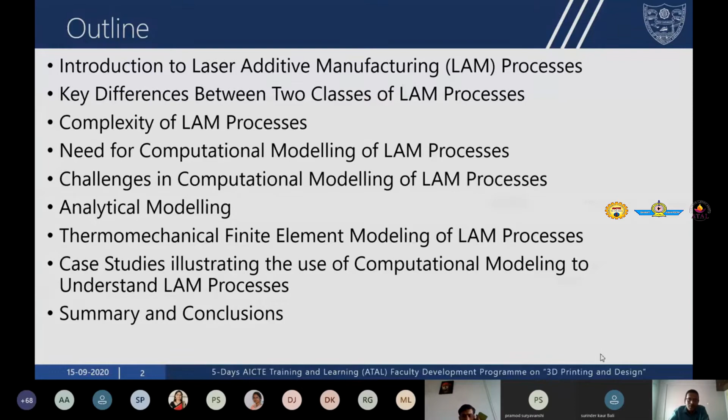As you can see here, laser additive manufacturing is a class of additive manufacturing process. You must be aware by now that in additive manufacturing, we start with a 3D CAD model, slice it into 2D cross-sectional layers, and then use a material addition process to fill the layers to build the part.

In the case of laser additive manufacturing, which is one class of AM process, you start with a 3D CAD model, slice it into 2D cross-sectional layers, and then use a laser as a heat source to melt the powder and deposit the material line by line and layer by layer.

All additive manufacturing processes have similar mechanics, and you can consider the mechanics on multiple scales. For example, continuously deposited beads or discrete droplets lead to the formation of a track of material.

You can see on the animation here a track being deposited right now, that's a track. Multiple deposited tracks or rows lead to the formation of a layer. You can see the first layer deposited, then multiple layers lead to the formation of a complex shape. So the hierarchy of AM process mechanics is: you start with a bead, multiple beads lead to a track or row of material, multiple rows lead to a layer of material, and multiple layers lead to the complex shape.

Additive manufacturing is divided into 7 major classes according to the ASTM classification. I'm only going to focus on 2 classes of AM process, essentially referred to as metal additive manufacturing processes. One is known as powder bed fusion, and the second is directed energy deposition. I'll only focus on these 2 categories, as other speakers are covering other classes.

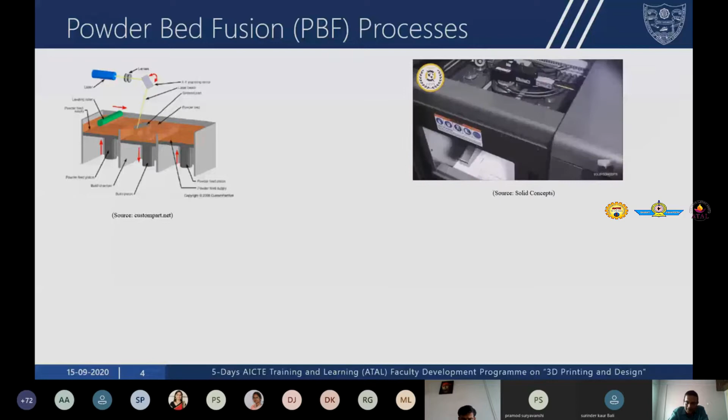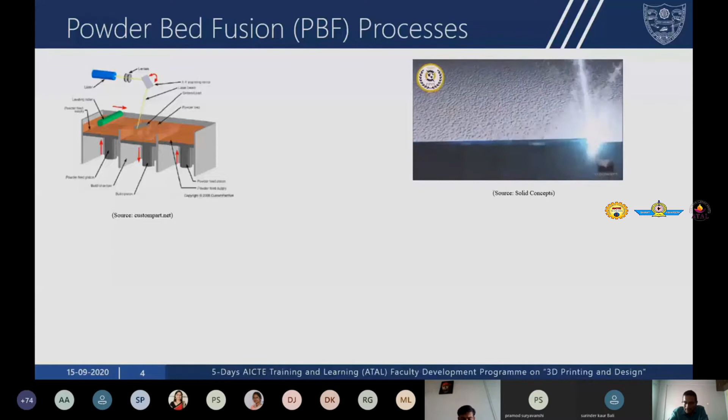Here you have the metal powder spread on a bed, and a laser scans the powder, melts it, and solidifies it. You then lower the platform to spread the next layer of powder, using a roller or a rake, and that next layer is again scanned by the laser. In this way, you build the part line by line and layer by layer.

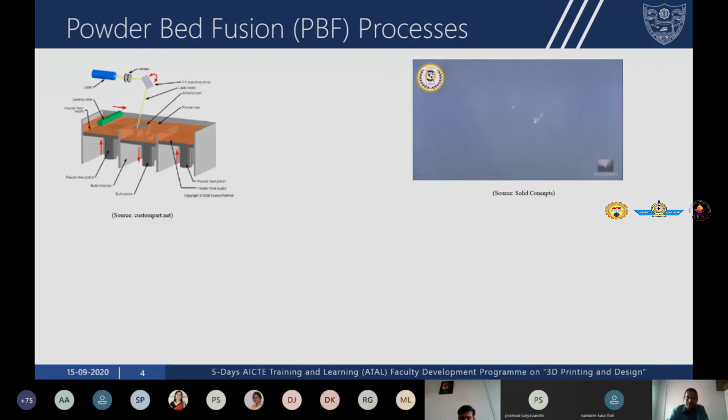You can clearly see here that you are lowering the build platform by an amount equal to the layer thickness, and raising the powder platform by a layer thickness to spread the next layer of powder. So in this way you build a part layer by layer. This process is called the powder bed fusion process, and there are 2 categories here.

If the laser is used as a heat source, you call it laser powder bed fusion, or LPBF. There is also another process where an electron beam is used as the heat source, called the E-beam process. I'm going to focus more on the laser powder bed fusion process.

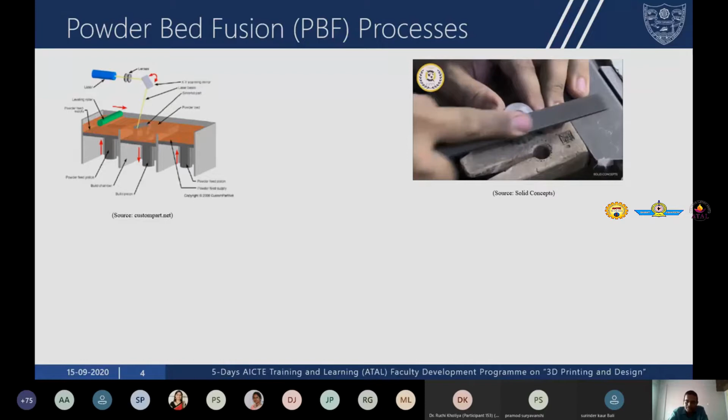The second category of process is known as directed energy deposition. Here, instead of spreading powder on a bed, we focus a high power laser beam onto a metallic substrate. This laser beam creates a molten pool on the metallic substrate.

Once the molten pool is created, you send powder through nozzles. You can see here the powder is sent through nozzles into the molten pool. This powder melts, and the substrate is then moved in the X and Y directions.

The laser moves to a different location from the molten puddle, which then solidifies, and the laser creates a new molten pool. By moving the substrate in X and Y directions, we create one track of material from a combination of several beads. By incrementing the laser beam and powder focusing lens assembly in the positive Z direction, we create the next layer. In this way, we build parts line by line and layer by layer.

The main difference between these 2 categories is: in the one shown earlier, you spread the powder on a bed and the laser scans it - that's called powder bed fusion. Here, you are not spreading the powder on a bed, you are feeding the powder through nozzles. Therefore it's called powder-fed, or directed energy deposition process.

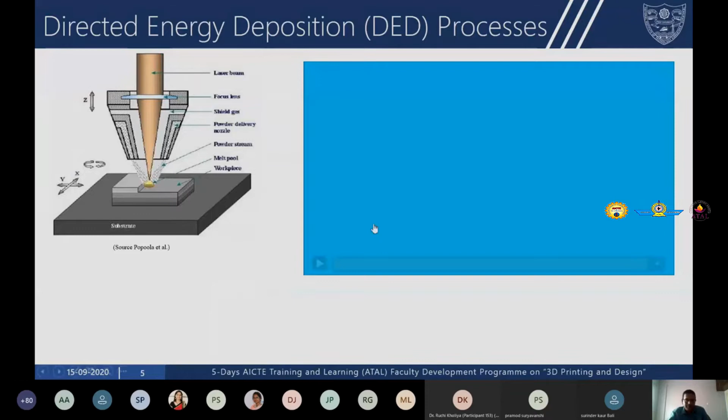Here again you have 2 categories: one that uses laser as a heat source, and one that uses electron beam as a heat source. I'm going to play a small video to highlight this directed energy deposition process. There are two techniques, and different machines have been developed, one of them called laser engineered net shaping.

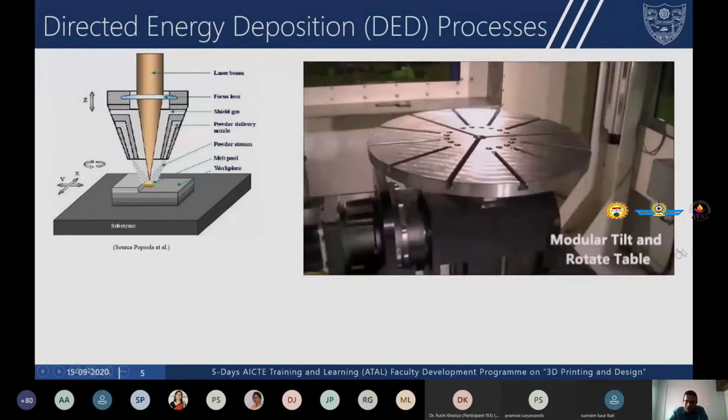So you can see here the machine. You have a rail system for handling large parts. Then you have a glove box.

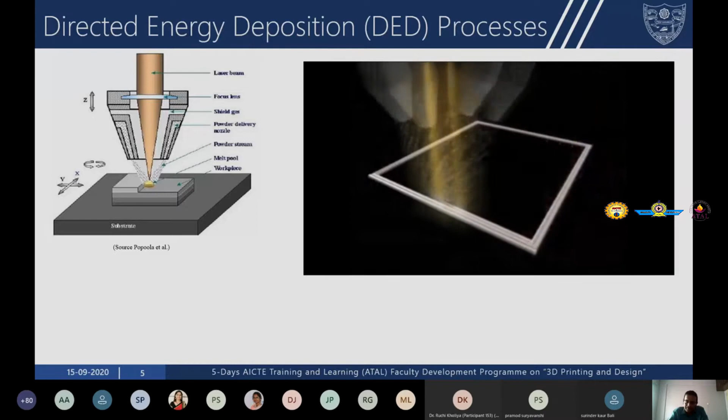So this atmosphere inside the machine will first be purged with an inert gas. You can see how the powder is being fed to the nozzle and how the powder interacts with the laser beam and creates a track of material. Multiple beads of droplets lead to a track of material.

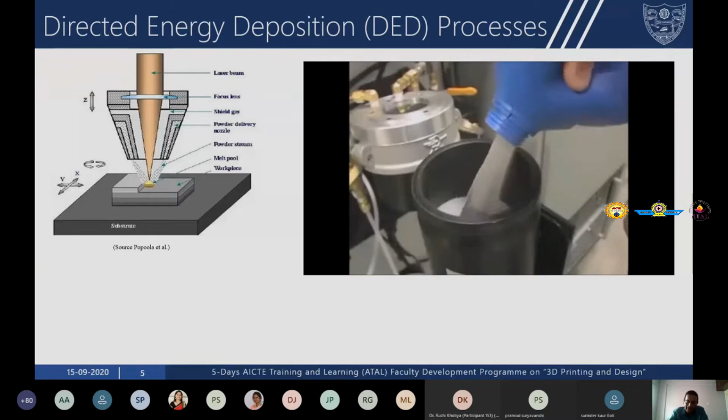Then you have the powder hopper being shown. You can feed either elemental blends or pre-alloyed powders. One advantage of this process is that you can create functionally graded structures. You can see the laser in action building the component, and the component being fabricated.

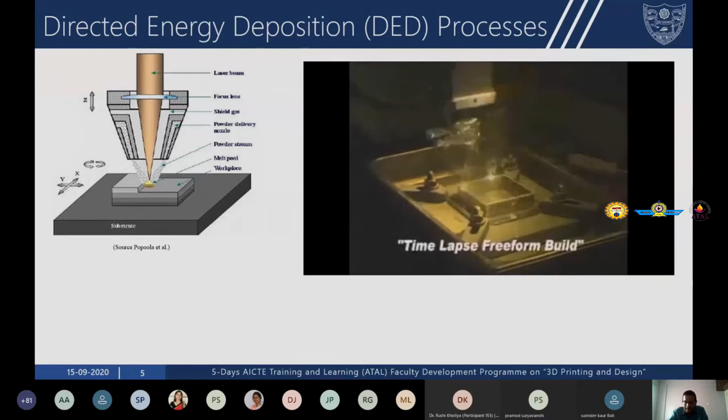You can see the deposition of a thin wall geometry using this laser additive manufacturing process. The molten region, shown in red and yellow, indicates the location of the laser and the molten material. You can see that as subsequent layers are deposited, the previous layers are heated up, and are heated and cooled. So there is a heating and cooling effect that takes place.

So this process is being used for repair of components.

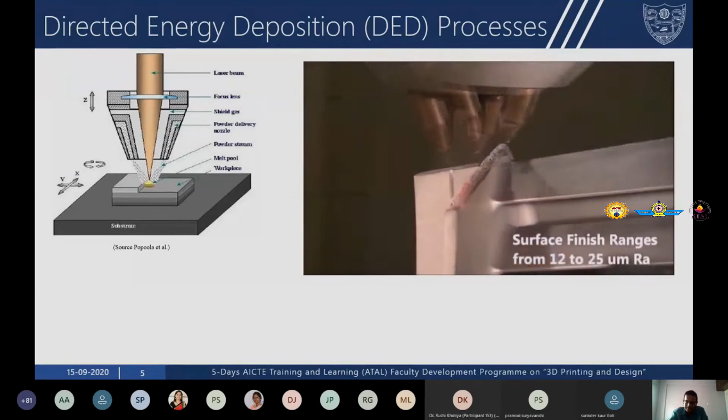So this is the second process, known as the directed energy deposition process. There are some important differences between this process and the earlier one. The directed energy deposition is also known as the powder fed process, whereas the process I showed earlier is called the powder bed process.

In terms of part size, the directed energy deposition or LDED process is capable of handling larger and heavier components compared to the powder bed process. Here the part size is limited by the handling system, whereas in the powder bed process, the part size is limited by the build chamber, and the build chamber volume is generally small.

Now, when you look at the powder particle size, the directed energy deposition process uses a larger powder particle size that varies from 50 to 150 microns, whereas the powder bed fusion process uses a much smaller particle size, from 20 to 50 microns.

The spot size of the laser beam used is larger in the case of directed energy deposition, about 0.5 to 4 mm, and much smaller in the case of powder bed fusion, which is from 50 to 200 microns.

The layer thickness is again much larger in directed energy deposition, from 500 to 1000 microns, and much smaller in the powder bed fusion process.

One of the big advantages of the directed energy deposition process is that you can deposit on an existing 3D surface or an existing part. Whereas in the case of powder bed, since you have to spread the powder on a bed, you need a flat surface or a flat preform.

The scan speeds in directed energy deposition are much lower compared to powder bed fusion. The maximum scan speed seen today is about 50 millimeters per second, whereas in powder bed fusion you can go up to 1000 mm per second.

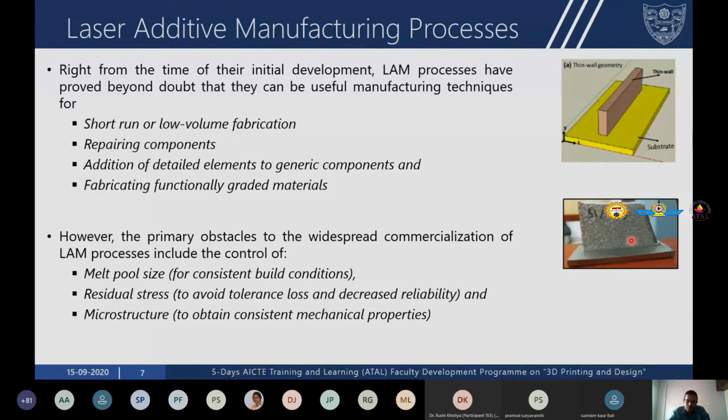This laser additive manufacturing process, both laser powder bed fusion LPBF and laser directed energy deposition LDED, are very complex in nature. The reason being that in these processes, you have a number of physical phenomena that interact with each other, sometimes simultaneously. For example, you have heat transfer, using laser or an electron beam as a heat source. Then there's fluid flow within the molten pool, the convective flows within the molten pool. Then you have melting, the powder is melted, the powder is solidified, so solidification occurs. There's a phase change, then you have solid state phase transformations. You have grain growth, you have diffusion. So a multitude of complex physical phenomena interact with each other, thereby making this process very complex.

Then several process variations are possible. For example, as I've shown you a little earlier, you have different spot sizes, different layer thicknesses, different sizes of powder particles that are used. So several process variations are possible, and then you can either spread the powder on a bed or you can feed it through nozzles. Then you have several important characteristics of the deposit that we need to understand, which I'll be discussing in the next couple of slides.

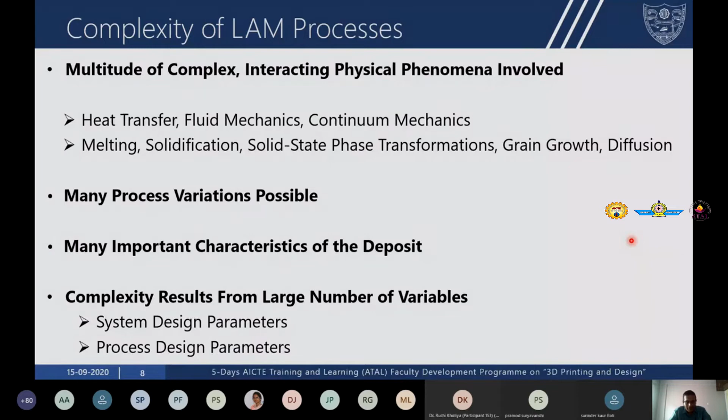Then the complexity in this process will also arise from the machine parameters as well as the process parameters. The machine parameters we are referring to as the system design parameters, and the process parameters include the laser power, what's the power that's used, the spot size of the laser, the scan speed, what is the layer thickness, what is the scan spacing, what is the scan strategy, and what is the substrate - is it at room temperature, or is it preheated to high temperatures to minimize thermal gradients, what is the inert gas flow rate, because you are going to purge the chamber with either argon or nitrogen inert gas. So what is the flow rate? Is there a post deposition heat treatment or hipping operation necessary to reduce residual stress or porosity?

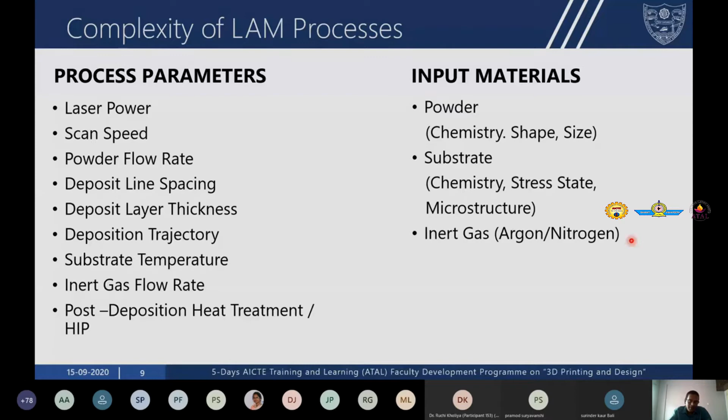And the input materials - the input material is generally powder. So what is the powder chemistry, the chemical composition? What is the powder particle shape? What is the size and particles? What is the particle size and distribution? Then what is the substrate? Because we are going to deposit this on a substrate in LDED process. So what is the composition of the substrate? What is the microstructure and the stress state? And what inert gas are we using? And what is the flow rate of the inert gas? So all of these process parameters and input materials, they add to the complexity.

Now, additionally, the complexity also arises from a large number of deposit characteristics that need to be understood. For example, as I said, we need to understand the melt pool because the melt pool controls the build conditions. So you need to understand the melt pool dimensions and shape. Then the residual stress is related to thermal gradients. We want to minimize residual stresses to decrease warping and distortion. Then we also want to look at what is the extent of bonding or lack of fusion, in other words, between the layers that are deposited. In general, you see porosity in this process. The porosity can be gas-induced porosity or lack of fusion porosity.

Then what is the microstructure that's obtained? What is the macrostructure? Then the crystallographic texture of the components, and the chemical composition. Many times the chemical composition of the powder and the chemical composition of the deposited part are going to be different because of the evaporation of the alloying elements. Then what are the structural and chemical gradients that will also cause the Marangoni effect in the melt pool.

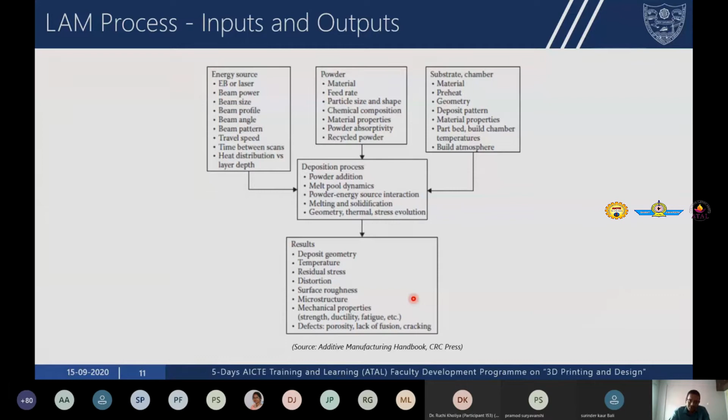Now, one of the most important aspects in metal additive manufacturing, which is a serious concern, is part quality. When you compare additive manufacturing, developed over the last couple of decades, to conventional manufacturing, the standards for qualification and certification have not yet been clearly established in additive manufacturing. This is because of the complex combination of machines, materials, processes, and techniques.

In the absence of standards and certification procedures and the absence of a reliable database, this reduces the confidence of the OEM, the original equipment manufacturer, to employ AM for fabrication of critical components for critical industries like aerospace, automobile, or medical industries.

Now, one of the big challenges in additive manufacturing comes from the multiple length and time scales. I'm going to discuss this in a couple of slides from now.

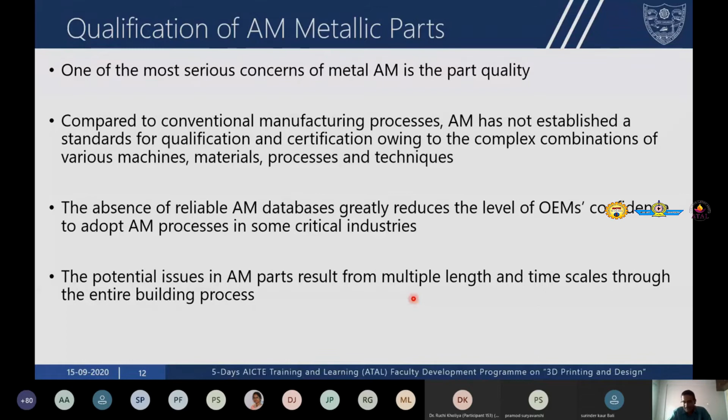How do we traditionally qualify the parts? Traditionally, parts are qualified by experimentation. This experimentation can be time consuming and expensive—sometimes creating a reliable database would take several years and cost millions of dollars.

One of the big challenges in AM is that you have a wide range of machines, a wide source of powder which can differ in particle size, shape, distribution, composition, and also the process parameters. All of this complicates the qualification procedure.

Therefore, computational modeling will play a very important role in qualification of metallic parts produced by additive manufacturing. This talk will focus on the need for computational modeling, the challenges in it, and how computational modeling can be used to gain insights into the additive manufacturing process.

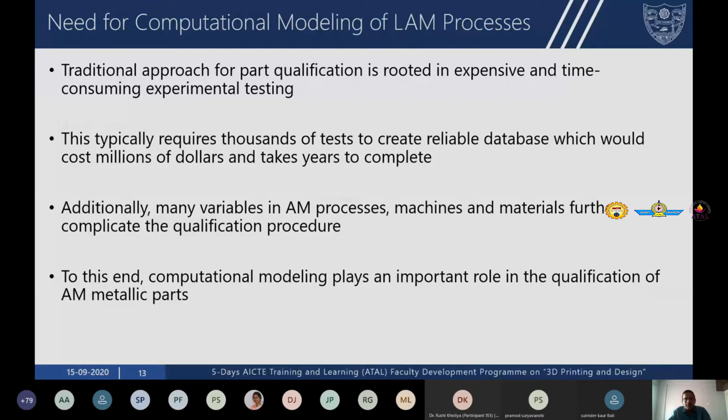One of the primary goals of computational modeling is to change how you traditionally optimize the processing parameters. Traditionally, processing parameters are optimized by trial and error, which can span a few years and cost several millions of dollars to optimize process parameters for a specific geometry and material.

If you're able to model the processes, the advantage is you'll understand the process physics better, enabling you to produce parts with consistent build conditions, lower residual stress, and consistent mechanical properties. Modeling also helps you understand physical phenomena better and obtain information that is difficult or challenging to measure experimentally, such as maximum temperature distribution, residual stress, cooling rates, and thermal gradients.

To summarize, modeling and simulation can be used as a tool to understand the effect of process parameters on the quality of deposit in the LAM processes, and thereby optimize process parameters using computational modeling, alleviating the need for extensive experimentation.

There are several challenges in the computational modeling of the LAM process. One of the first challenges is how do we model the addition of material? In additive manufacturing, you are building a part by addition or consolidation of material, so how do you model that addition?

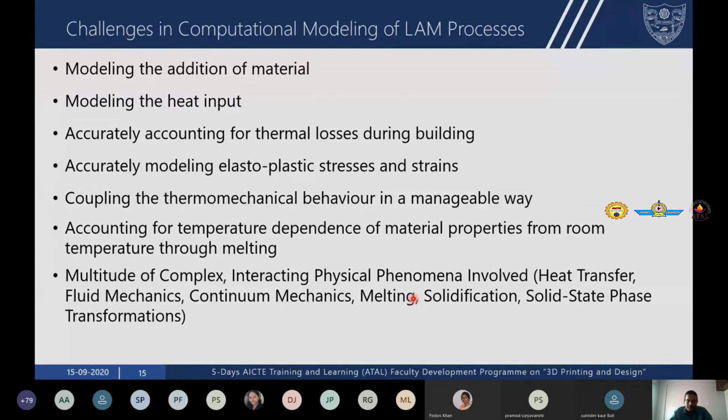As mentioned earlier, one challenge in additive manufacturing is that it involves multiple length and time scales. What do we mean by this? Consider the diameter of powder particles - you're anywhere in the range of 20 to 50 microns in powder bed fusion process, to 50 to 150 microns in direct energy deposition process.

I mentioned 50 microns for the LDED process. The diameter of the laser beam in LDED can be anywhere from 0.5 to 2 mm - you can see the order of difference in length. The dimensions of the workpiece can be anywhere from few cubic centimeters to few cubic meters - again an order of difference of length.

And the build time can be anywhere from a few hours to a few weeks - again an order of difference of time.

For example, this data is obtained from a CRC Press handbook on additive manufacturing, showing the estimated computer simulation time for a build height of 100 mm - a very small build height - with a layer thickness of 20 microns and 5000 layers. You can see it took several days even with GPU machines.

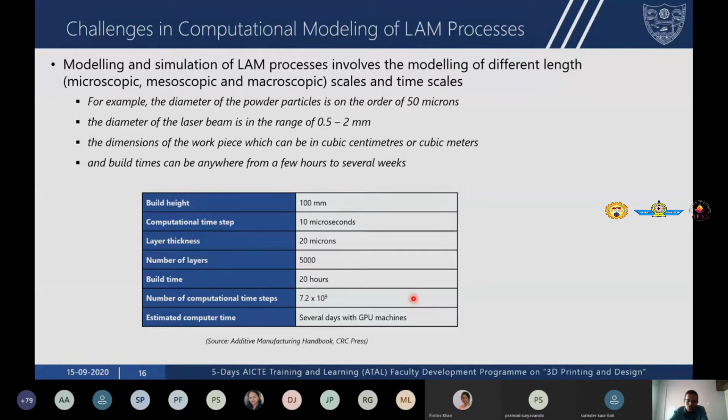You can see that even the most sophisticated high performance computers take significantly high computational time to solve simple AM geometries. So one of the greater challenges for simulation is completing the simulations in useful time.

You should be able to complete the simulations in a small fraction of the build time. Thereby, you should be able to optimize the process parameters for a certain build or deposit within a small fraction of time, before the first part is deposited.

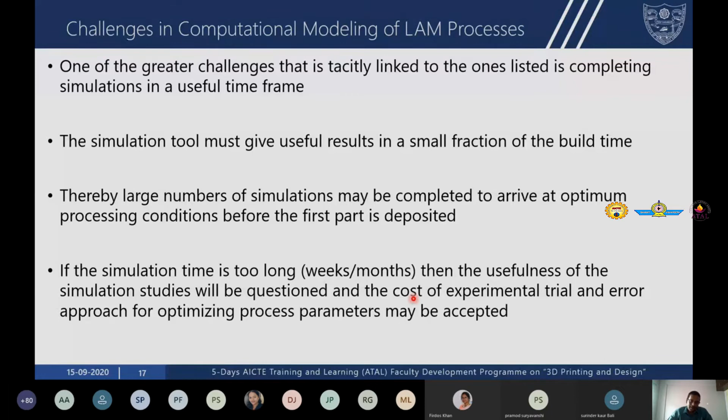If the simulation time is too long - taking weeks or months - then the industry people will question the usefulness of the simulation. If you're able to deposit parts in weeks and months, and simulation takes the same amount of time, the industry will question its usefulness, and the expensive trial and error approach of optimizing process parameters, involving a lot of time and money, will be accepted instead.

The first challenge in the laser additive manufacturing process is how do we add material? Additive manufacturing can be thought of as multi-pass welding. In welding, you are joining two materials, generally about one row of material, but in AM you're adding materials - so it's nothing but multi-pass welding.

Now, how do you take into account this addition of material? Generally, a technique used in welding called the element birth death technique is used to add material. Now, whenever you're adding material into a finite element model, essentially what you are doing is increasing the number of equations.

Now, we cannot add this material once the simulation has started. So essentially, the model has to be created in the pre-processing step itself, and the model is going to be meshed into elements and nodes.

Now, at the start of the simulation, the elements are deactivated or made dead by multiplying their material properties with a scaling factor of 10 raised to minus 6. This ensures these elements do not contribute to the global system of equations in the finite element system.

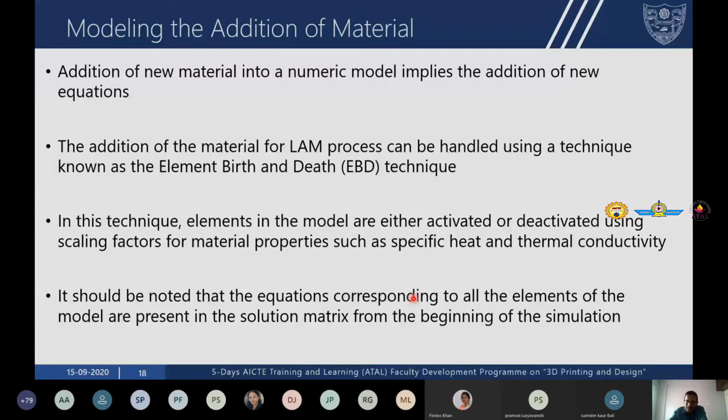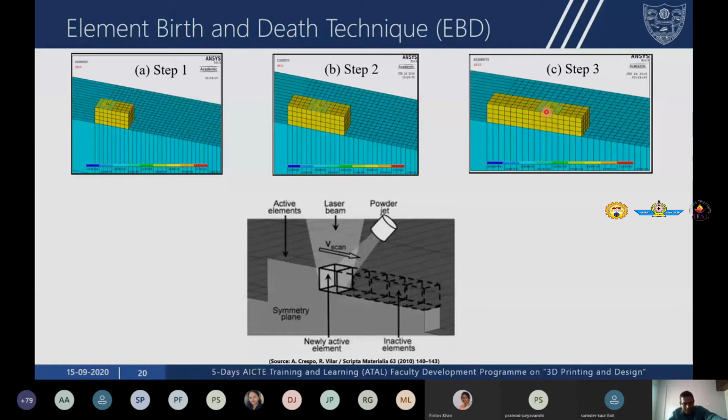Now, when we say inactive elements, we are not going to remove them from the model. We are only making them inactive by multiplying their thermophysical properties by a small value such as 10 raised to minus 6, so that they don't contribute to the stiffness matrices. That is called the scaling factor.

Now, when we reactivate these elements, when the laser comes over them, we reactivate the element. When we reactivate, what do we do? We bring the material properties of these elements back to the original values. The original material properties are reassigned. So that is called element birthing or activation of elements.

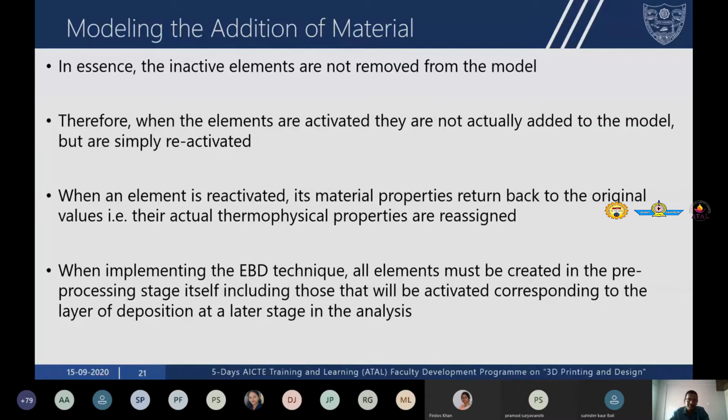Second challenge is, how do we model the heat input? In the laser additive manufacturing process, the heat source is a laser. Now, how do we account for the heat input from the laser? One of the most commonly used models to account for this is that the laser is generally modeled as a heat source with a Gaussian distribution.

There are other heat source models, such as a volumetric heat source model where optical penetration depth is also considered, and these have been used in literature in the simulation of LAM processes.

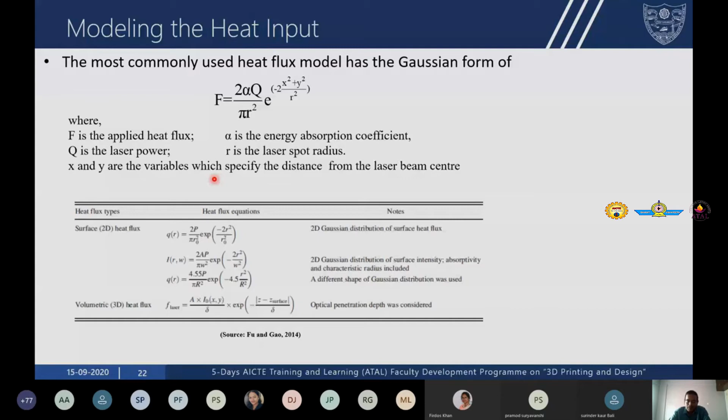One of the important challenges in computational modeling of laser additive manufacturing is the laser absorption coefficient alpha. This absorption coefficient depends upon several parameters, starting with the material being processed. For example, if you look at aluminum and titanium, aluminum, being highly reflective, will have a lower absorption coefficient compared to titanium.

The absorption coefficient alpha also depends on the surface roughness of the material, whether oxide films are present, the temperature of the material, and the wavelength of the laser. Nd:YAG lasers have a different wavelength compared to CO2 lasers. It also depends on the angle of incidence of the laser beam, the interaction time between the laser and powder particles, the power density, defined as power divided by scan speed times diameter, the particle size and distribution of the powder particles, and the laser spot size and profile.

All these factors affect the laser absorption coefficient alpha, and this parameter is needed for computational modeling work, yet it is a very complex parameter to obtain experimentally.

Now, there are other heat source models that have been used in literature. These heat source models take into account phenomena such as fluid dynamics in the molten pool, because it has been widely established in the simulation of welding and additive manufacturing that convective flows within the melt pool play a very important role in determining the shape of the molten pool. The driving force for these convective forces can be buoyancy or density differences within the molten pool, or surface tension driven flows, also known as the Marangoni effect, or thermocapillary flow. Fluid flow and heat transfer are both very important in determining the size and shape of the molten pool, as well as the micro and macro structure of the additive manufacturing components.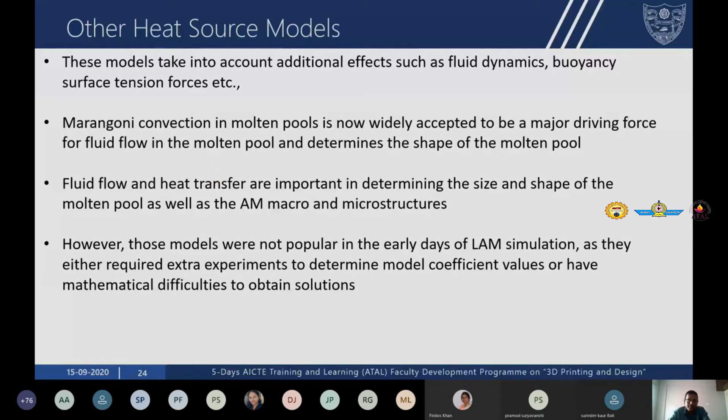The next step is modeling the heat transfer. We all know that in additive manufacturing, multiple beads lead to a track, multiple tracks to a layer, and multiple layers to a part. So essentially, we are consolidating material to form the part. How are we consolidating material? By using a heat source. Now, what is happening to the energy that comes from the heat source? This energy is taken by the powder.

A part of this energy is dissipated by convection and radiation. There is also conduction. So how do we account for this energy loss by convection, conduction, and radiation? You can use the energy balance equation from thermodynamics, and express this as QL equals QCD plus QCV plus QR, where QL is the heat flux from the heat source, QCD is the heat loss due to conduction, QCV is the heat loss due to convection, and QR is the heat loss due to radiation.

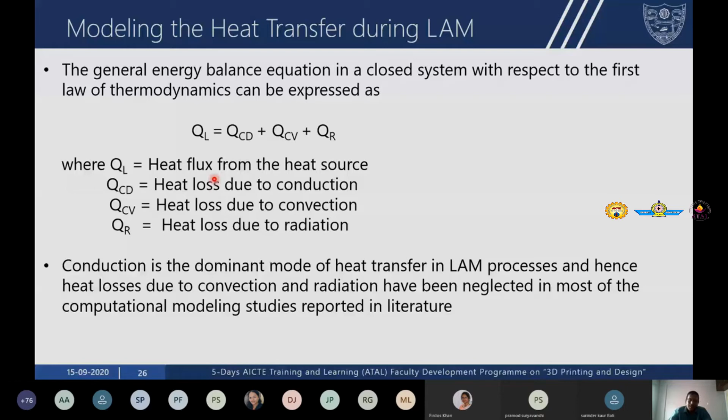Now, it has been widely established in laser additive manufacturing process that the predominant mode of heat loss is conduction through the substrate, which acts as a heat sink, and the heat losses due to radiation and convection are much smaller when compared to conduction. In many cases, the heat losses due to convection and radiation have been neglected in the computational modeling studies reported in literature.

Now, as you're all aware, there is a phase transformation occurring from solid to liquid during heating and from liquid to solid during solidification. In order to account for the phase transformation, the enthalpy change due to the phase transformation needs to be taken into account. This enthalpy change is dH equal to Cp dt, where Cp is the specific heat. Now, including the enthalpy change, the heat conduction equation takes this form.

The initial conditions for heat transfer can be expressed by defining an initial condition, the initial temperature of the substrate. The substrate can be at room temperature or it can be preheated to minimize the thermal gradients. The heat losses by convection and radiation are also considered from the free surface of the part. Here, H is the convective heat transfer coefficient, sigma is the Stefan-Boltzmann constant, epsilon is emissivity, and Q dot S is the rate of heat input from the beam. So this is the equation that we are going to solve: the heat conduction equation incorporating the enthalpy change, this is the initial condition, and this is the boundary condition.

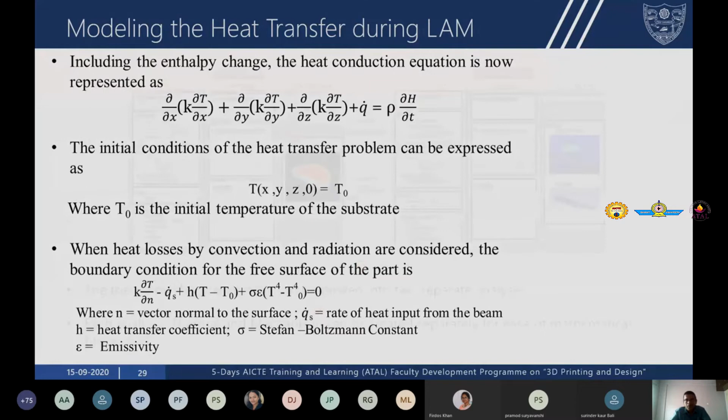Now, one important challenge is how do we couple the thermomechanical behavior? In additive manufacturing, the heat is causing the mechanical response. So you have a thermomechanical phenomenon occurring, and the residual stress is evolving because of the temperature. This thermomechanical phenomena can be broken into two analyses: thermal and mechanical.

Now, either they can be conducted simultaneously or sequentially. If they're conducted simultaneously, it's called a coupled analysis. If conducted sequentially, it's called an uncoupled analysis. This animation shows a thermal analysis and a mechanical analysis. If done simultaneously, it's called coupled; if done sequentially, it's called uncoupled. I'm going to explain what I mean by that.

Now, in the thermal analysis and mechanical analysis, you have different steps: pre-processing, solution (processing), and post-processing. The same goes for the mechanical analysis. In the pre-processing stage for both, you have geometry, meshing, boundary conditions, loading, and material properties. The equations solved in the thermal analysis and the mechanical analysis are shown here.

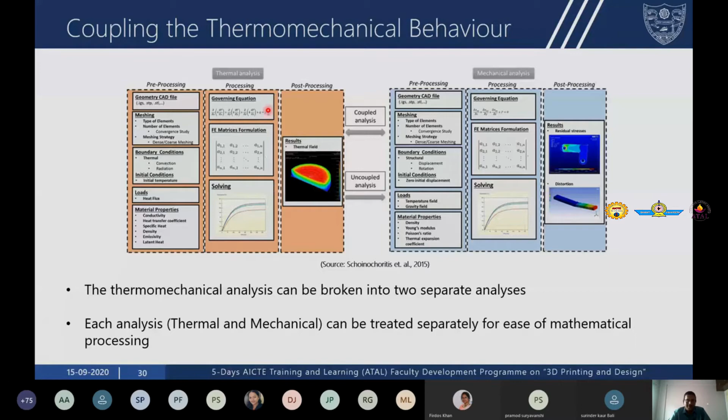Now, when you are solving the coupled analysis, essentially there is an interaction between the temperature and the stress field. That is, the upstream affects the downstream and the downstream affects the upstream. Temperature affects the mechanical response — let me explain this way.

When there is a thermal gradient, a residual stress is produced, and when these residual stresses exceed the yield point, plastic deformation is caused. This plastic deformation is converted into heat, and this heat is used in the calculation of the temperature field. So there is an interaction between the temperature and stress fields in the coupled analysis — you have to solve the thermal analysis and the mechanical analysis simultaneously.

Whereas in the uncoupled analysis, there is no interaction between the temperature and the stress fields. You do the thermal analysis first, then record the nodal temperature as a function of time at each node in the model, saving it as a file, and then input that into the mechanical model. This is called uncoupled analysis.

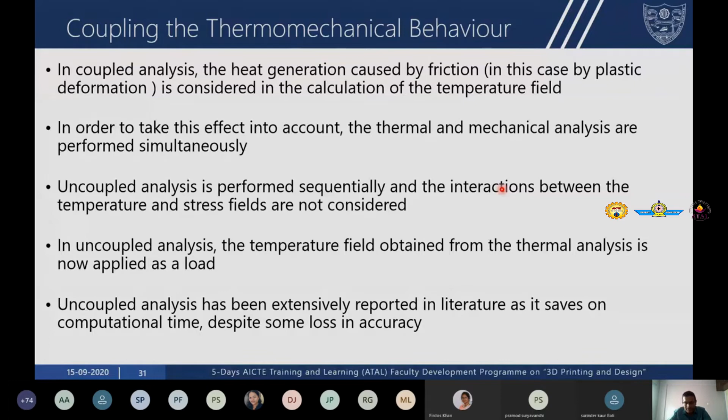Now, uncoupled analysis has been widely reported in literature because it's less complex — you are solving fewer equations at the same time. Even though there is some loss of accuracy, it has been more widely reported in literature compared to coupled analysis. So this is the flowchart for the uncoupled analysis.

First, you perform the thermal analysis. You define the initial conditions, boundary conditions, loads, and material properties. You save the results from the thermal analysis as a jobname.rth file, and then at every node in the model, you record the temperature as a function of time, which is read into the structural analysis as a load.

In the structural analysis, the element type is again changed. You apply the boundary conditions, loads, and material properties, then solve the structural analysis. The file is called jobname.rst, and you obtain displacements, strains, and stresses.

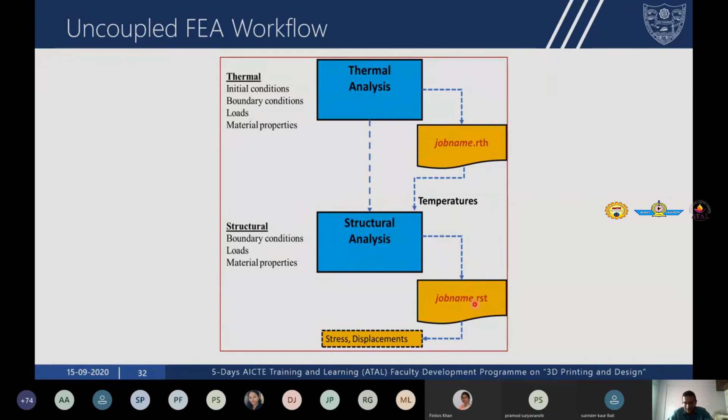I'm going to discuss now about analytical modeling. So far I have discussed the different classes of LAM processes, the differences between the two classes, why they're complex in nature, and the challenges in computational modeling of these processes. Now I'm going to discuss analytical modeling, which, as all of you are aware, is a closed-form solution that you can obtain mathematically.

In the early days, when laser additive manufacturing processes were developed, people were looking at how to find the cooling rate when depositing stainless steel 304 or titanium. They were interested in finding the gradients that contribute to residual stress. So they went back to literature and found that analytical models existing in welding literature could be used for additive manufacturing, since additive manufacturing is nothing but multi-pass welding.

The Rosenthal solution makes several assumptions. The first is that the properties of the material are constant — they do not vary with temperature, but in actual physical sense, material properties vary with temperature. The geometry is infinite or semi-infinite, meaning the dimensions are such that the melt pool never sees the free edges. The heat source is a point heat source, and the rate and energy of the heat source remain constant, as does the speed of travel of the heat source.

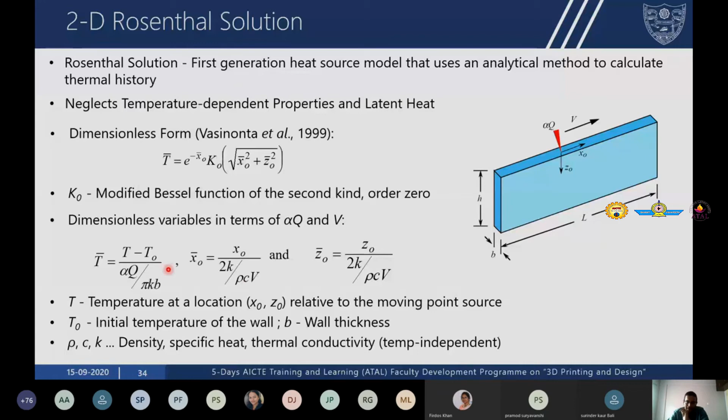So T bar equals T minus T naught, divided by alpha q over pi k b, where k is the thermal conductivity, which is constant, b is the wall thickness, rho is the density, and c is the specific heat. The thermal conductivity, density, and specific heat are all considered constant or temperature independent properties. T naught is the initial temperature, and T is the temperature at location x naught, z naught relative to the moving point heat source.

Now, from this equation, we can differentiate with respect to time and obtain an expression for the cooling rate. This is the expression for the cooling rate, where the dimensionless time is defined as follows. This equation can again be differentiated to obtain expressions for dimensionless thermal gradients, both in the x direction and in the z direction.

The dimensionless thermal gradient in the x direction is given by this equation, and the z direction is given by this equation. In all these three equations, K1 is a modified Bessel function of the second kind, order 1.

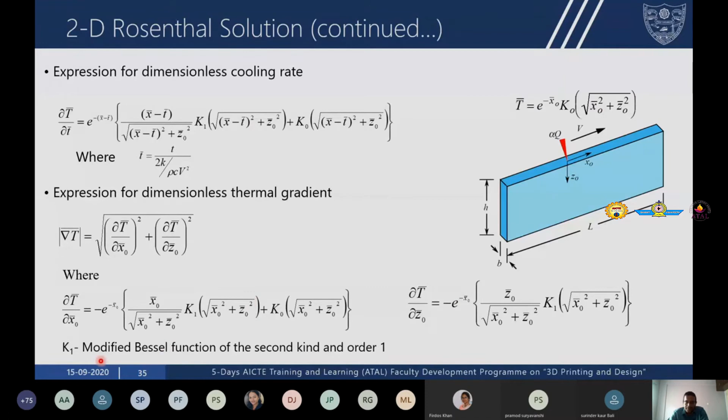Now, when you're obtaining dimensionless values, they may not make much sense, so you have to convert them into actual values. The relationship between dimensionless cooling rate and actual cooling rate is given by this expression, and the dimensionless thermal gradient and actual thermal gradient is given by this expression.

Now, how do you find out the cooling rates and thermal gradients? When you have a heat source, it's going to create a molten pool. So we are going to evaluate.

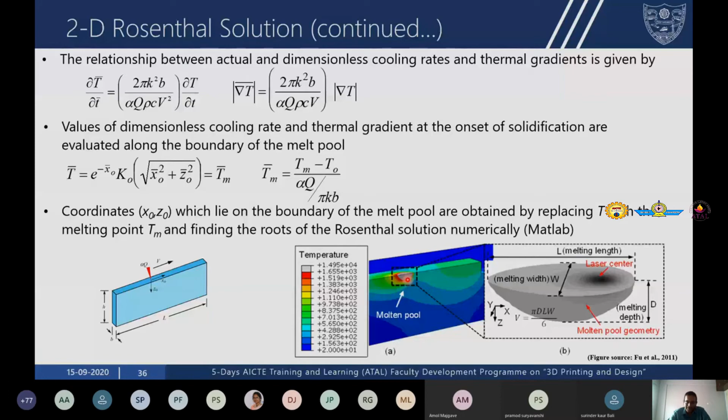Now, it's important to understand that these process maps have been generated for constant material properties. Therefore, they can be applied to any material system.

Now I'm going to discuss finite element modeling of the LAM processes.

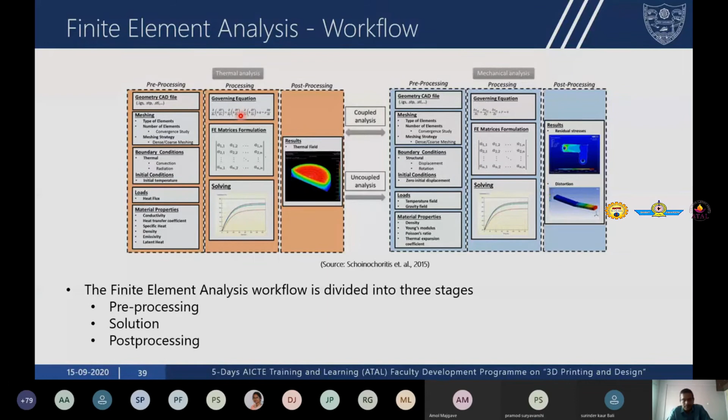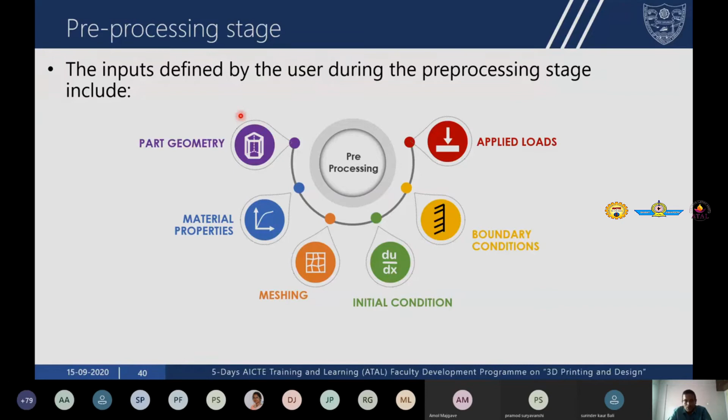In the pre-processing stage, you have to define the geometry of the part that you're building, and the material properties of the material being deposited. These material properties can be a function of temperature, both thermophysical and mechanical properties such as elastic modulus, yield strength, and so on. You have to mesh the part, apply initial conditions such as substrate temperature, apply boundary conditions such as convection and radiation, and apply loads such as heat flux. All of this is done in the pre-processing stage.

For material properties, in the thermal analysis you have to define properties such as density, specific heat, thermal conductivity, and latent heat, which accounts for the phase change. For the mechanical analysis, you define properties such as elastic modulus, yield strength, Poisson's ratio, a hardening model, and a coefficient of thermal expansion. Many of these properties are defined as a function of temperature.

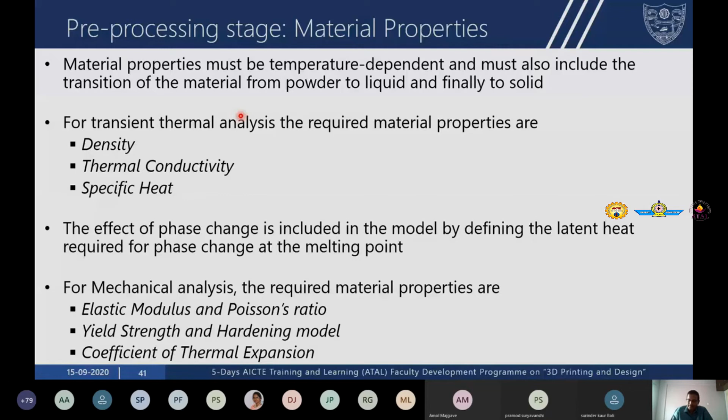An important step in pre-processing is meshing. As discussed earlier, in AM we use the element birth and death technique to simulate the addition of material. The accuracy of the simulation is determined by the characteristics of the mesh. The problem is, if we go for a very fine mesh, that increases computational time, and AM simulations, because of multiple length and time scales, are already very time consuming.

Therefore, a popular technique used in AM is to apply different mesh densities in different regions of the model. In regions near the heat source with steep thermal gradients, a very fine mesh is used for accurate analysis, while regions away from the heat source use a coarse mesh. As you build layers, when depositing the 20th layer, the thermal effect on the 10th layer may become less significant. In such cases, already deposited layers may be meshed with a coarse mesh to reduce the number of elements in the model. So you're using a meshing scheme with different mesh densities in different regions, along with adaptive meshing based on the location of the heat source.

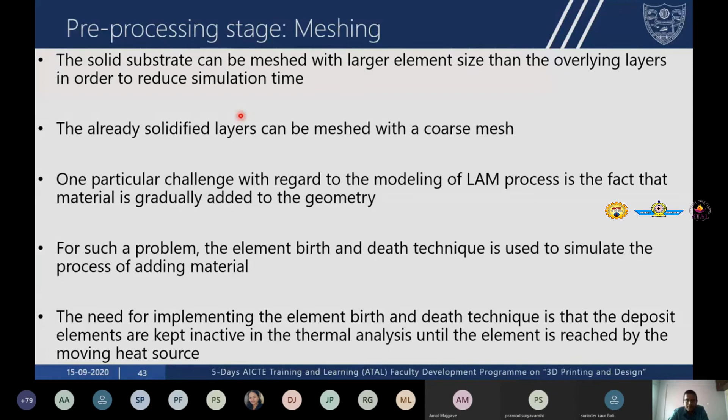As I said, already solidified layers can be meshed with a coarse mesh, and we use the element birth and death technique to add material and consolidate the part. In the solution stage, we are essentially solving partial differential equations.

I've shown earlier the equation we want to solve for the heat transfer problem. The physical mechanisms that drive this laser additive manufacturing process are highly nonlinear because of the temperature variation of material properties and latent heat effects. Therefore, we solve nonlinear FEM models using either the implicit method or the explicit method for solution.

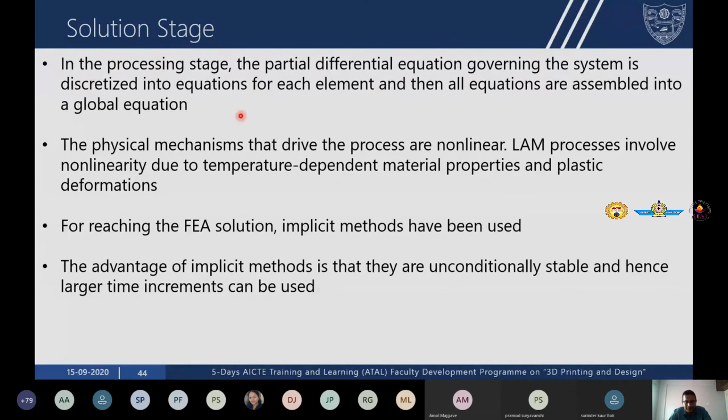This is the heat transfer problem discussed earlier, written in the finite element system of equations. Here, K is the thermal conductivity matrix, C is the specific heat matrix, T is the vector of nodal temperatures, T prime is the time derivative of T, V is the velocity vector which equals 0 as mass transport is neglected, and Q is the nodal heat flow vector.

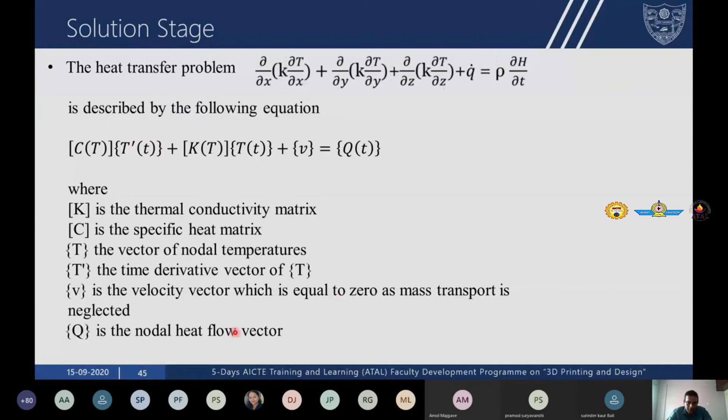Once you solve the thermal analysis, you may have to solve the mechanical problem simultaneously or sequentially. For the mechanical problem, we replace the thermal element with a structural element that can handle elastic-plastic behavior. The resulting model undergoes a nonlinear elastic-plastic structural analysis, requiring temperature dependent material properties such as yield strength, thermal expansion coefficient, and elastic modulus, along with a hardening model, which can be bilinear or multilinear.

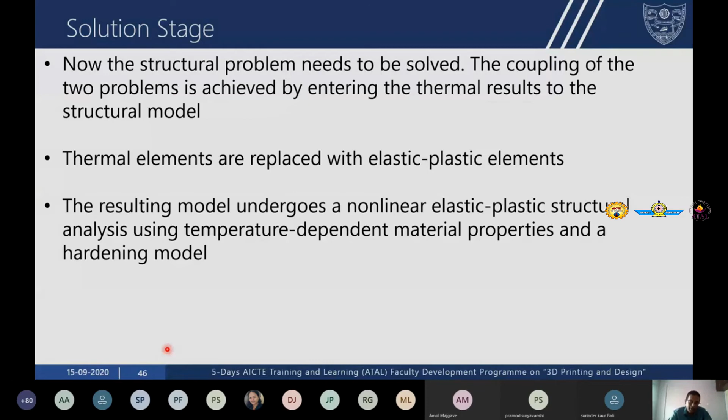In the uncoupled analysis, we read the nodal temperatures from the thermal analysis into the structural analysis as a load.

This animation shows the finite element simulation of a thin wall geometry using the finite element software package ANSYS. You can clearly see that a single layer is being deposited, a single track of material in each layer, and multiple layers are being deposited for the thin wall part. So remember the mechanics: bead to track, track to layer, layer to part.

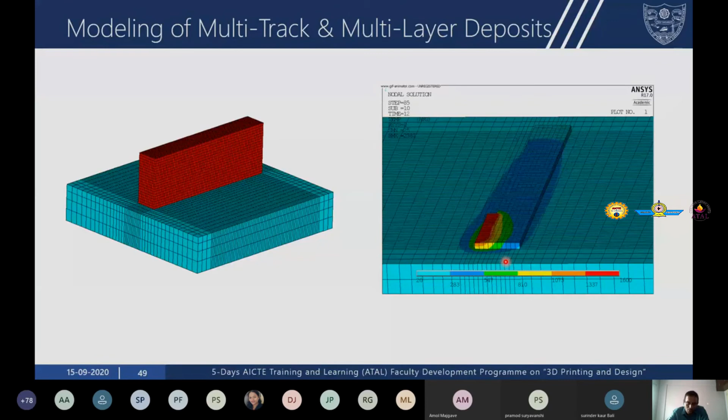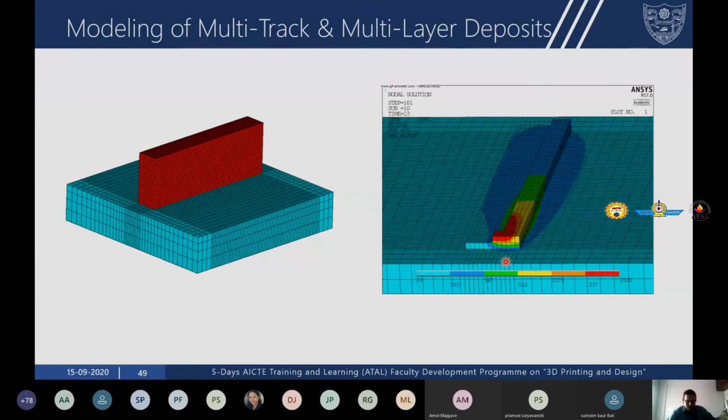Once you finish the solution, the next stage is post-processing, where you can extract a wide variety of information from the finite element models. One piece of information is the dimensions of the melt pool — you can find out the length, width, and depth. A consistent melt pool is required for consistency in the build conditions.

We can find out the shape of the melt pool, which is influenced by the convective flows within it. We can find the maximum temperature and the distribution of temperature, the thermal cycling undergone by each layer, and the rate of cooling, which determines the grain size. We can find thermal gradients, which determine the residual stress, and the cooling rates and thermal gradients together influence the grain morphology. We can also determine the thermal stresses and strains.

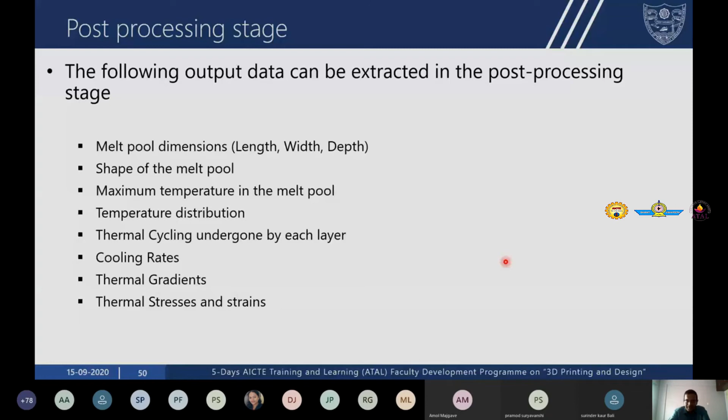Now I'm going to present some case studies that we have carried out at NITK using computational modeling of laser additive manufacturing process to understand and gain insight into these processes. The first study is

using the material system titanium alloy Ti64, one of the most widely used aerospace alloys. This work has been published, and the publications are mentioned here. I'm going to discuss the effect of process variables on key deposit characteristics in laser deposited Ti64.

Here I'm showing you the simulation of a thin wall geometry of Ti64, where you can see the evolution of the melt pool geometry as the number of layers increases. You can clearly see that as the number of layers increase, the size of the melt pool increases.

This is because when depositing the first layer, you have the substrate beneath it, which is at room temperature generally, acting as a heat sink and removing heat. But as you deposit subsequent layers, the effect of the substrate decreases, and therefore the size of the melt pool increases as the number of layers increases.

This poses a challenge because we need a consistent melt pool for consistency in build conditions. Therefore, a number of additive manufacturing processes use real-time feedback control, so that as the melt pool size increases, the process parameters are changed — either power is decreased or scan speed is increased — to maintain consistency in the melt pool.

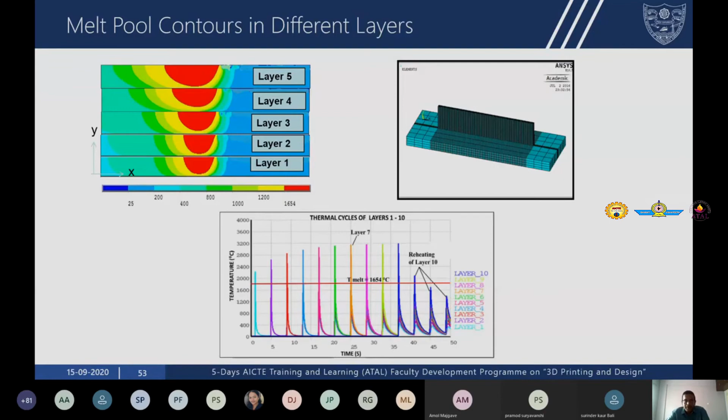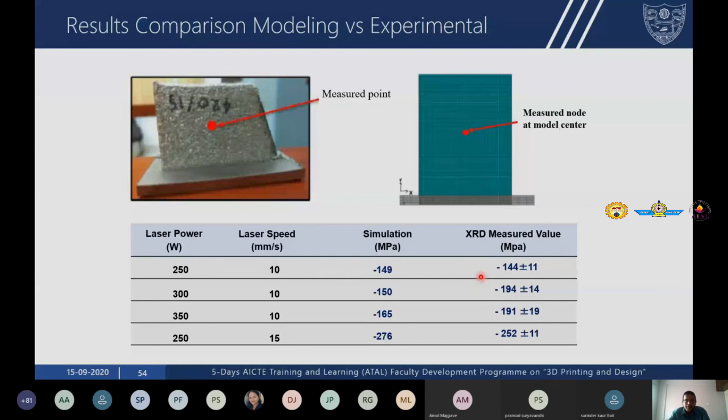As shown earlier, we have used analytical solutions to obtain process maps for cooling rates and thermal gradients. You may ask why use an analytical solution which makes several assumptions regarding constancy of properties, semi-infinite geometries, constant heat input, and constant travel speed of the laser. The advantage is that you can obtain a ballpark value of cooling rates and thermal gradients for different materials and processing conditions within a few minutes, compared to finite element models which can take a few days to a few weeks depending on complexity.

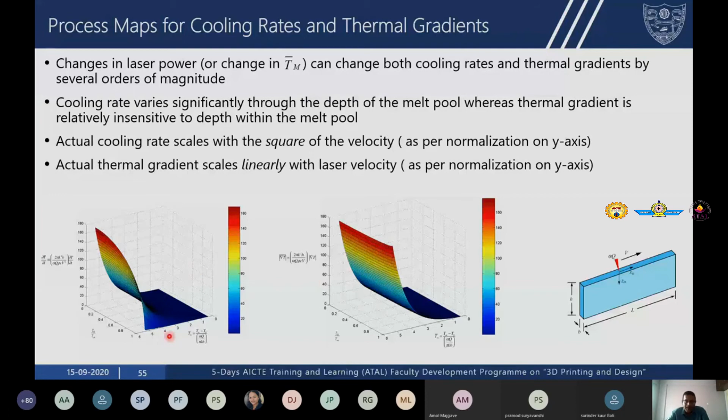So here, we ran the analytical models, obtained the process maps, and used that information to define a new parameter called solidification rate R, which is the ratio of cooling rate to temperature gradient G. This solidification rate and cooling rate can be used on solidification maps available for some materials such as Ti64 and Inconel 718. These maps enable you to predict whether the grain morphology upon solidification will be columnar, equiaxed, or mixed.

The next slide shows comparison results. This is a solidification map plotting G, the thermal gradient, on the y-axis, and R, the ratio of cooling rate to thermal gradient, on the x-axis, from the finite element model results. The map is divided into three regions: fully columnar, mixed, and fully equiaxed. This is for different powers at a constant scan speed.

These results are from the analytical model, the Rosenthal solution, again plotting increasing depth, where this is the surface of the melt pool and this is the bottom, for the same set of process parameters. This is the experimental result obtained at 370 watt power, which falls within the set of process parameters considered here, and it shows a fully columnar morphology. The modeling results also show a fully columnar morphology, with long and elongated grains as in the experiments. So the modeling results are in good agreement with experimental observations.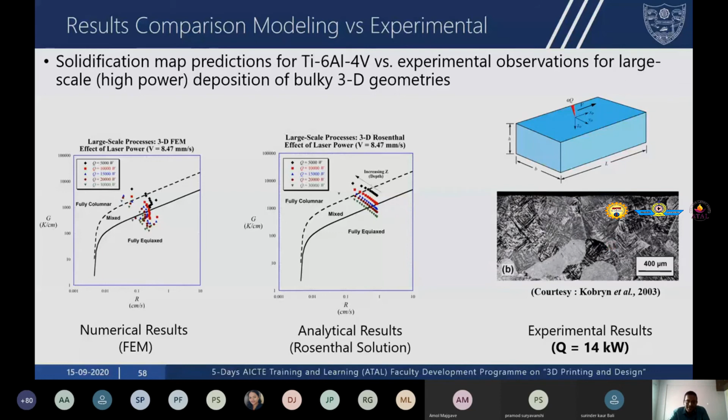Now the second case study that I'm going to present is one we have done in Inconel 718, where we have tried to validate our computational models with existing experimental work published in literature. This is from a 2017 paper.

In this paper, they have done the laser metal deposition or laser direct energy deposition process, where they deposited 10 layers, single track, on top of a substrate. We have also simulated the process, and this is our model on the right side compared with the work from the publication.

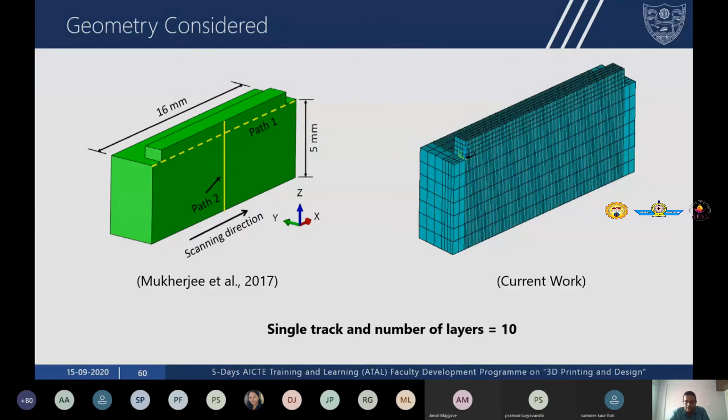You can see these are our predictions for residual stress along the build direction, and these are the predictions from the model published in literature. The predictions are in reasonably good agreement, and the minor differences in magnitude and distribution of residual stress can be attributed to the fact that we have neglected fluid flow in our models, whereas the authors have considered fluid flow.

Neglecting fluid flow can result in over-prediction of temperatures and over-prediction of cooling rates, and that could be the reason why our results were slightly different from those published in literature. So these are the residual stresses along the build direction.

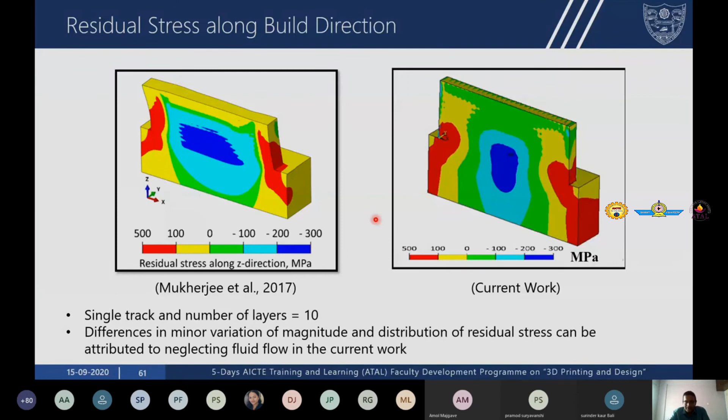The next case study is when you are going for a multi-material deposition. For example, when you are depositing H13 tool steel on a copper substrate, in comparison to the results published in literature in 2017.

The first is unidirectional: you go from left to right, then you have a dwell time for the laser to move back from right to left, and then scan again. This is the alternate scanning strategy, where you go from left to right, then right to left, then again left to right, right to left.

Now, these are the results published in literature, for the temperature in layer 1, layer 4 is the dashed line, and substrate is the small dashed lines. These are our results. You can clearly see that the results obtained from our computational models are in good agreement with what's already published in the literature.

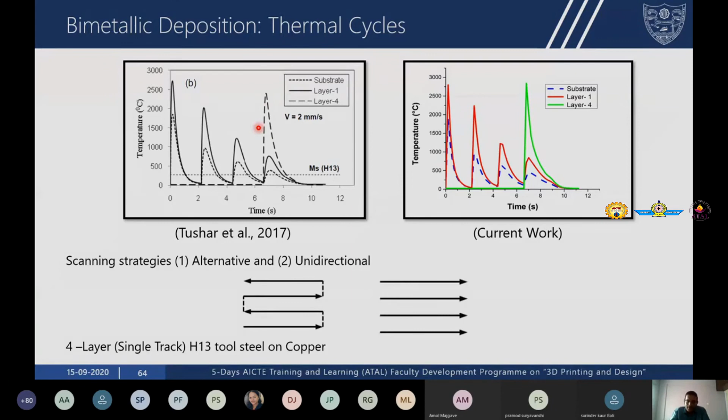This shows that the models are giving information that is not only useful to understand the physics happening in the process, but also allows you to obtain valuable insights about temperature, residual stress, thermal cycling, cooling rates, and thermal gradients.

This is the residual stress at the interface between the copper and H13 steel, obtained from the published paper, and these are our results for an alternate scanning strategy.

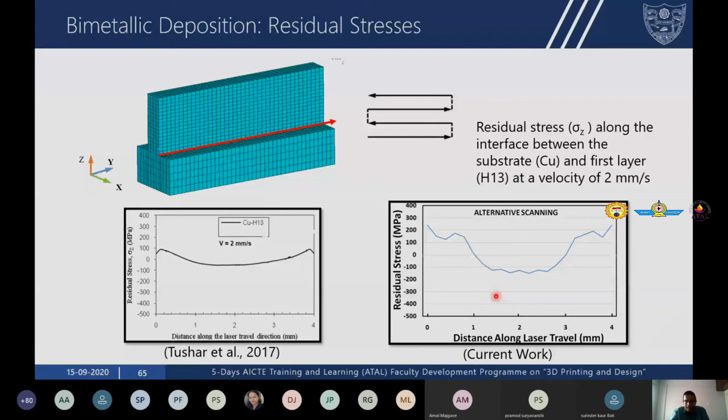This next case study shows the simulation for selective laser melting of Ti64. This is for the powder bed fusion process. As I've shown earlier, powder bed fusion has much smaller beam spot size, much smaller layer thickness, and much smaller powder bed particle size.

They have presented experimental results for the case of only solid, and for the case where they consider both powder and solid, because if you remember, you have powder on the bed which is solidified, then you have both powder and solid on the same bed, and then experimental results.

These are our results from our models. You can see that our results have good agreement with those obtained from their models. This chart shows the percentage error between our results and theirs, and you can see the error is within 10%, or within 5% in many cases, indicating the usefulness of the models to obtain trends and results.

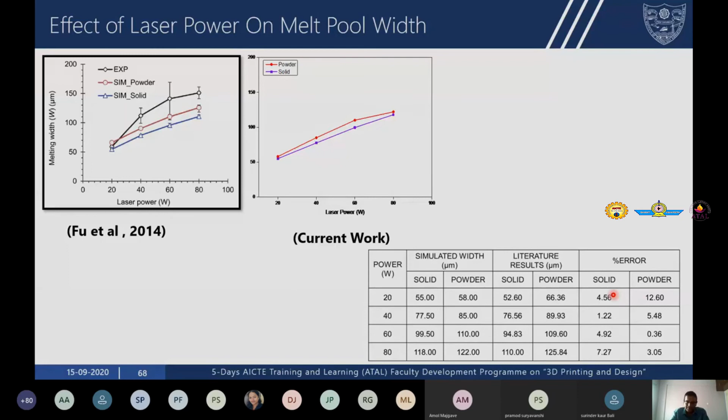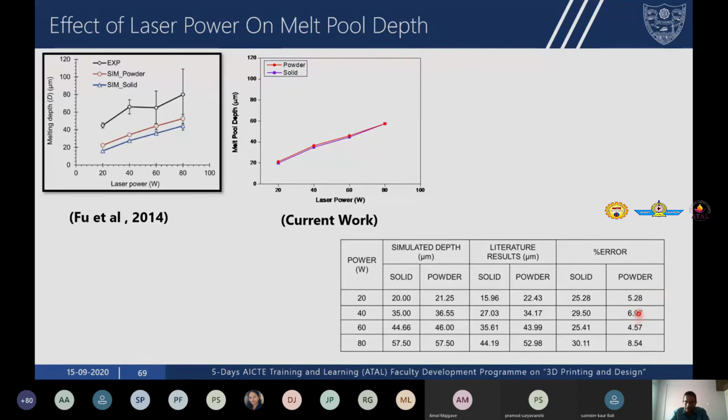The last case I'm showing is when we consider fluid flow in the models. As I said earlier, heat transfer and fluid flow affect the shape of the molten pool, and they also affect the dimensions of the molten pool.

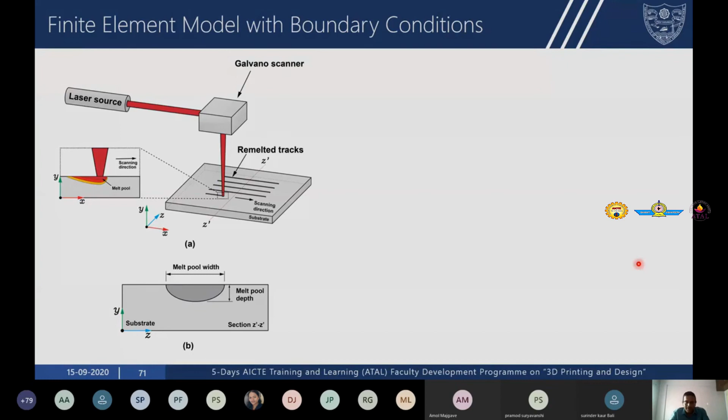So what we have done here is we have carried out laser surface melting, where we have used lasers to scan single tracks on the surface of Inconel 625. These are the deposited tracks. This is the laser source that is controlled by a galvano scanner, as in the powder bed fusion process, and this is the scanning direction.

This is the obtained melt pool cross section in the ZZ plane, and this is the finite element model. This is the Gaussian heat flux that we applied, the scanning direction, and the bottom is fixed at the temperature substrate, and you have convection and radiation on all the sides.

So this results here shows the heat source moving from the left to the right, and you can clearly see the results comparing experiments, the model with fluid flow, and the model without fluid flow. If you consider the three red color indices here, the first one is the experiment at 500 watts. Then the solid line is with fluid flow, and this is without fluid flow. You can clearly see that the one with fluid flow is in better agreement with the experiments compared to the one without fluid flow.

So incorporating fluid flow becomes very important when you are trying to predict the shape of the molten pool, the maximum temperature, and as well as the residual stresses. As I said, when you neglect fluid flow, you are going to over predict the temperatures because you are not considering the convective flow in the melt pool. You are going to over predict the cooling rates as well as the thermal gradients.

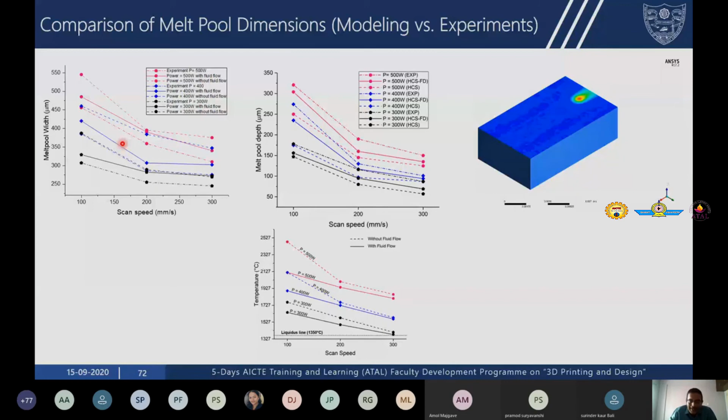And also, the reason why fluid flow determines the shape is that depending upon the temperature coefficient of surface tension, the flow can be from the center of the molten pool towards the edge and then downwards back again, or it can be from the edge towards the center, in which case you have heat transfer occurring from the source to the bottom, and you have a deeper and narrower melt pool.

Let me explain this once again. If you have a negative temperature coefficient of surface tension, then you're going to have a flow from the center to the edge, then downwards. In that case, you're going to have a melt pool that's shallow and wide. If you have a positive value of temperature coefficient of surface tension, the flow occurs from the edge toward the center, downwards and up towards the center. In such a case, you have a deeper and narrower melt pool.

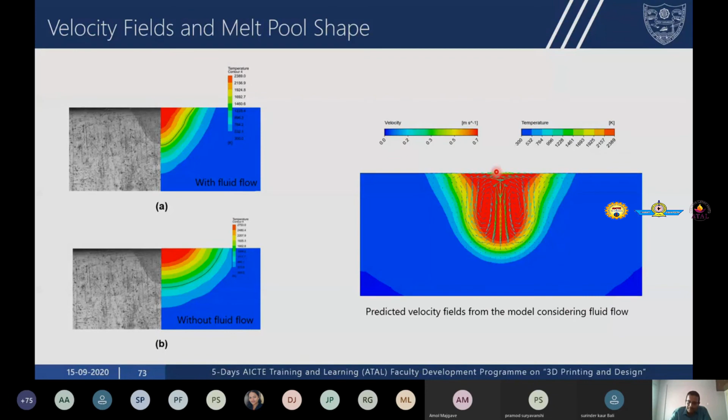So the importance of considering fluid flow surface tension effect is apparent here from these simulations.

So in summary, these laser additive manufacturing processes are under consideration for aerospace components, and they offer increases in efficiency and flexibility compared to conventional manufacturing processes. During the deposition of either single track or multi-track, multi-layer components, a complex thermal history is experienced by the build because of repeated heating and cooling cycles. This complex thermal history induces residual stress in the component, which is the main source of cracking, delamination, or distortion of the components.

One of the important challenges is to minimize the residual stresses by control of process parameters, and this can be done through computational modeling that will enable you to arrive at optimum process parameters for minimal residual stress. The computational modeling can also be used to understand the process physics, consistency in build conditions, cooling rates, and thermal gradients that will determine the microstructure of the material.

And as I said earlier, one important aspect that has been predominantly neglected in computational models of laser additive manufacturing is the incorporation of fluid flow. Our work has shown that fluid flow can increase the complexity of the FEM models or computational models, but it will provide you with very valuable information regarding the shape of the molten pool.

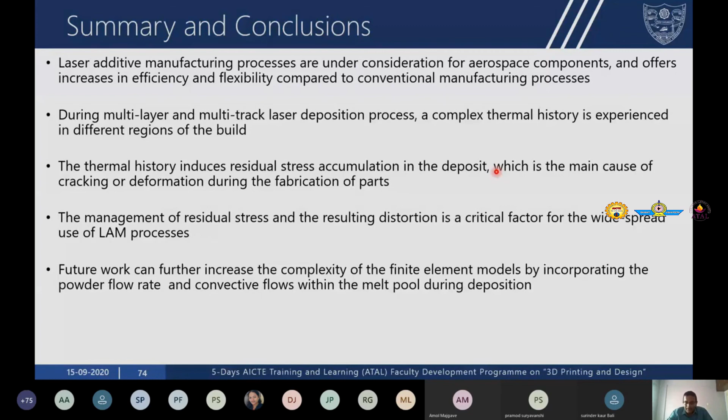And this concludes my presentation. Any questions? I'll be very happy to answer.